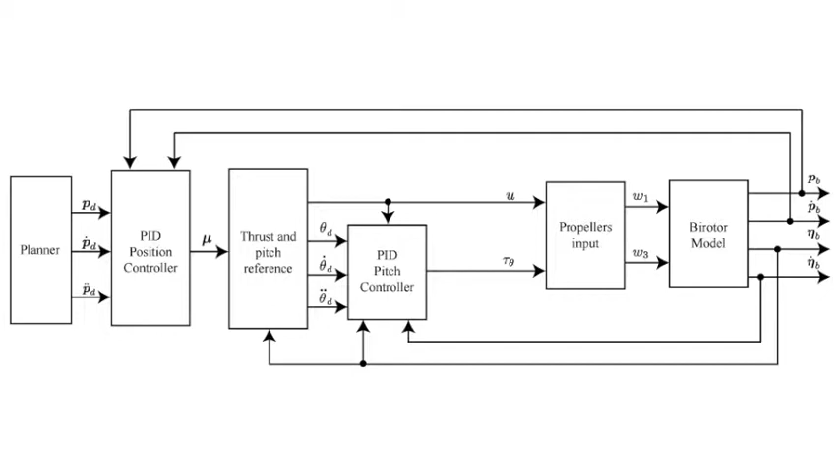The control is designed by employing a PID-based controller, allowing to reach any position in the Cartesian space, dropping the possibility to control the yaw angle. In this case study, a straight-line emergency landing trajectory is planned. The birotor has to reach the origin of the Cartesian system in 20 seconds. The birotor stays for other 30 seconds in a steady-state condition.

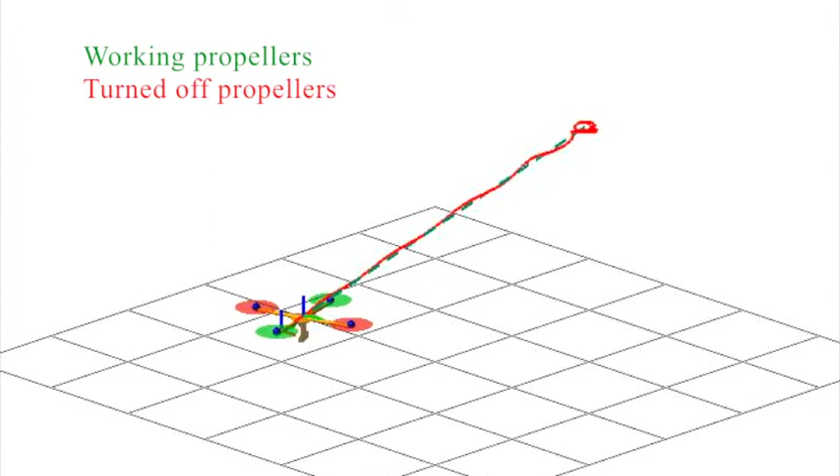In order to better emulate practical issues, the same planned trajectory as before is employed, but noise has been added to the measurement signals of position, linear and angular velocities, and orientation. Moreover, initial roll and pitch angles have been set to 4 degrees to simulate the case in which the tolerant control is switched on and the initial conditions of both angles are reasonably non-zero.

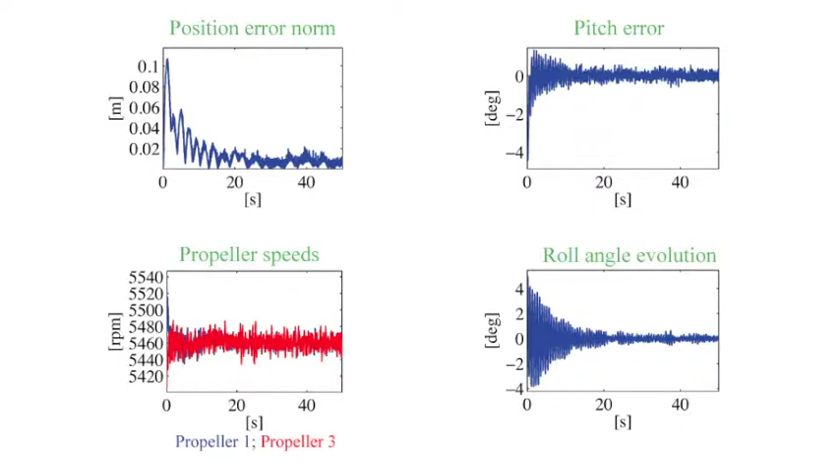It could be noticed how the noise affects all the time plots. The stability is still preserved. The uncontrolled variables, like the roll angle, remain bounded as well as the pitch and position errors.

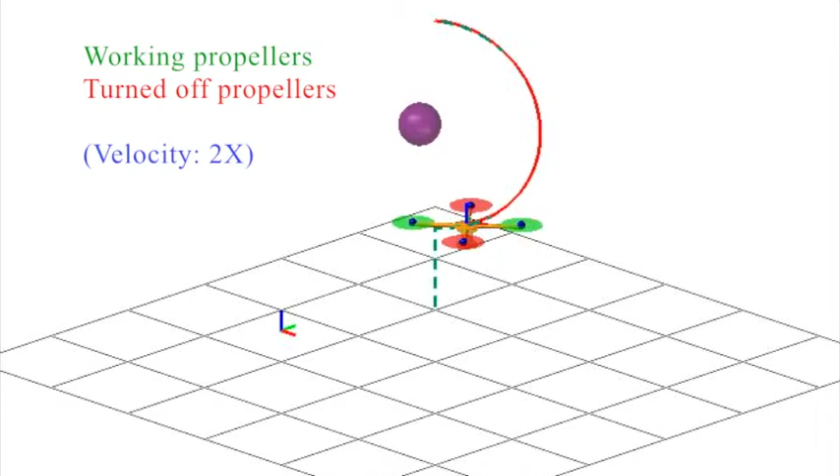In this case study, the presence of an obstacle has been simulated. Therefore, the planned trajectory is first a semicircle, with the duration of 20 seconds, and then a vertical straight line towards the origin of the Cartesian system. The duration of this part is of 25 seconds. The birotor stays in a steady-state condition for other 15 seconds.

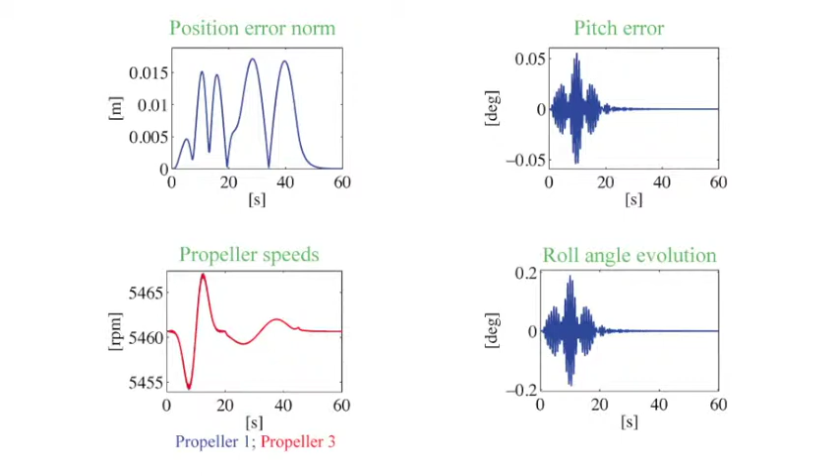The tracking is again quite accurate. In the vertical part of the path, the desired pitch angle is 0 and the related error appears to be 0 as well.

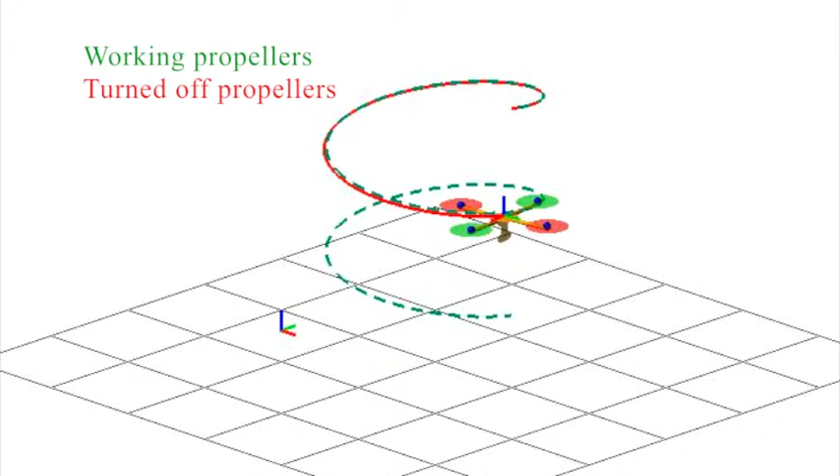The stability proof exploits a Lyapunov-based method for perturbed systems. It is in fact possible to verify that the pitch tracking error affects the performance regarding translational tracking. The tracking is accurate even with such type of trajectory. This proves the good performance of the proposed architecture.

The uncontrolled roll angle remains bounded. The values of the propeller speeds do not saturate. The simulations here presented have been realized with the MATLAB Simulink environment.